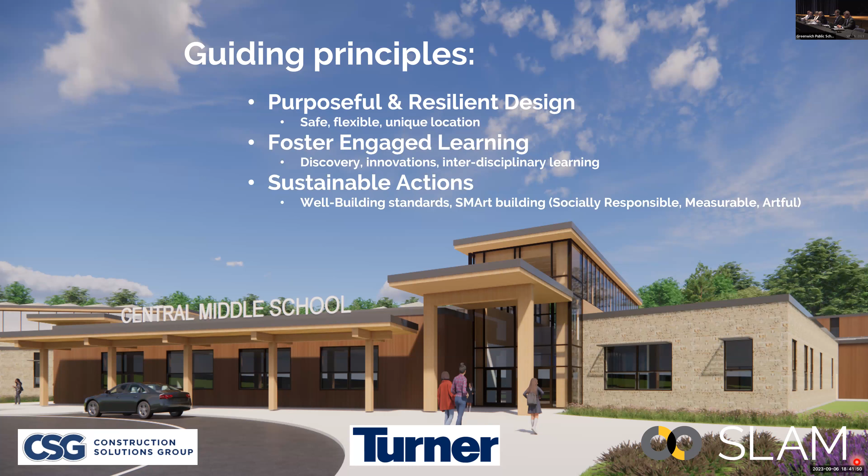The building itself sits on the central middle school site, the existing site, and I think everybody understands the premise of the project — there's an existing building on site. We're going to build a new building where the existing playfields are, get that completed, tear down the existing building, and then build playfields where the existing building is.

One of the things we talked a lot about was just the perception of entering that site, how the building would be organized and how it would feel. A lot of those guiding principles helped form the architectural character. The design team's been working really hard on developing these 3D renderings to communicate the character we envision for the new Central Middle School.

This view you're looking at would be coming down the new main entry drive — the parent drive, where parents would come in, queue up, get as close to the front door as they could, drop their student off, and turn and come back out. You can see how the building fits back into the site nicely, with trees sitting up behind this two-story building, and how the whole building nestles into that northern part of the site. I'll show you the site plan in a little bit, but I think the character of the school is really, really important at this point.

Moving a little closer into the building, I mentioned that the parent loop loops in really close to the front door, so you can see how the front entry is really evident. We're trying to use some really sustainable materials for the exterior skin.

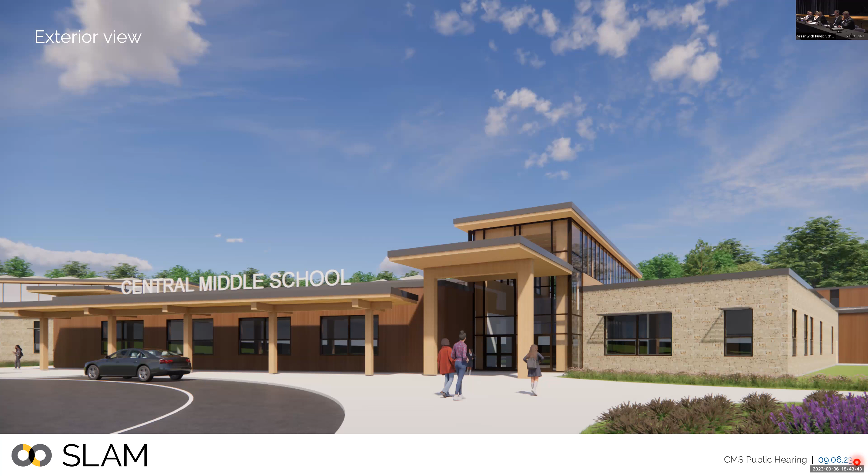You also see some hints of sustainability on the roof. We're anticipating photovoltaics on the roof, and all the renderings we're developing depict that, and we're trying to find a common thread and theme throughout the entire design of the school to be sustainable.

The other thing we've talked a lot about is safety for the students and staff, and anybody coming on site. It's been a recurring conversation, and every decision we make as we develop the floor plan and the site goes back to the question: are we creating a safer site for the students and staff and anybody on site? The answer is always a resounding yes, and the building committee's been really aware and cognizant of the decisions we've made.

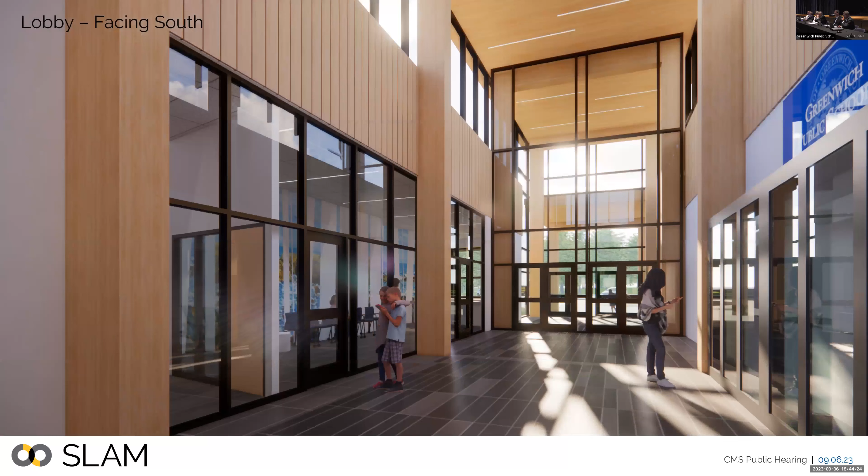Also looking on the inside of the building, the wood character actually replicates itself and turns into the building. One of the sustainable avenues we're exploring is timber construction, cross laminate timber roofs and beams in the structure of the building.

This is just a rendering of the main lobby. This would be a secure lobby - any visitor coming to the school would come through this space into the main lobby and check into the main office. You can see how the character on the inside of the building is beginning to replicate what you saw on the outside in the 3D renderings as well.

One of the really important things is not just the exterior skin and what it looks like, but the educational values. As we move into the building and start designing the floor plan, it's been absolutely critical to work with Tom and his staff to make sure we're meeting the Board of Ed's program requirements and educational specifications. There's a lot of interesting descriptions and adjacencies that are super important in that document. As a check and balance, we're always having conversations with Tom and his staff to confirm that we're providing the best educational value in the floor plans and the interior character depicted in some of these renderings.

For the interior of the building, which is clearly more my area of expertise, it's been great to work closely with the team. As Jim just pointed out, there's been a lot of back and forth from the EdSpec process into the actual layout of the building, and we've gone through numerous phases and options. What we love about this particular layout is how it really supports our educational experience for students and what middle school is really about for them - it's student focused and centered on what their needs are at a critical time in their lives.

If we want to go to the next slide, what we also love about being central is that we are a community space as well. We're frequently rented out by various community groups, and we want to maintain that level of partnership with our community in the best possible way.

So in looking at the design of the first floor, it really meets all of our educational needs and school-based needs through the layout of all the spaces down below, with the auditorium being a central focus, the gym and cafeteria off to the left, the media center toward the back, and offices and counseling space over to the right with some of our other electives.

Really the student experience when they spend their 2 periods a day in elective classes - it's all located on that first floor. But after hours, when these areas may be used for performances or rentals, they can be closed off from the rest of the school, keeping community use separate from the student academic spaces. I know our custodians also find that quite helpful.

We spend a lot of time discussing orientations and adjacencies, and also light. The courtyard in the middle - it's very important to have natural light in our classrooms for learning. It makes a positive learning experience for kids, and so how we were able to bring that in while nestling into the back of the hill was something important. That's where this courtyard came in, providing opportunities for art and other areas to bring in light, and the media center as well. So we're very excited about this.

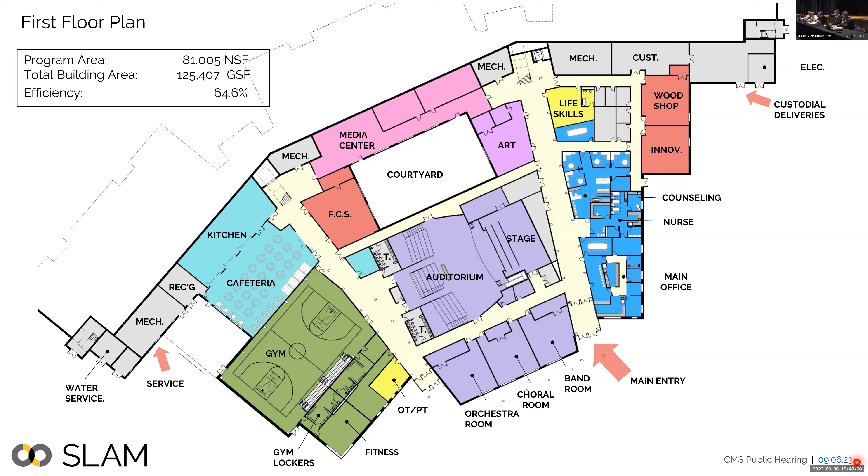Next slide. And then the upper wings, this is an ideal situation. If anyone knows... oh, I need to be louder. The problem is I'm using a microphone, I'm used to just bellowing.

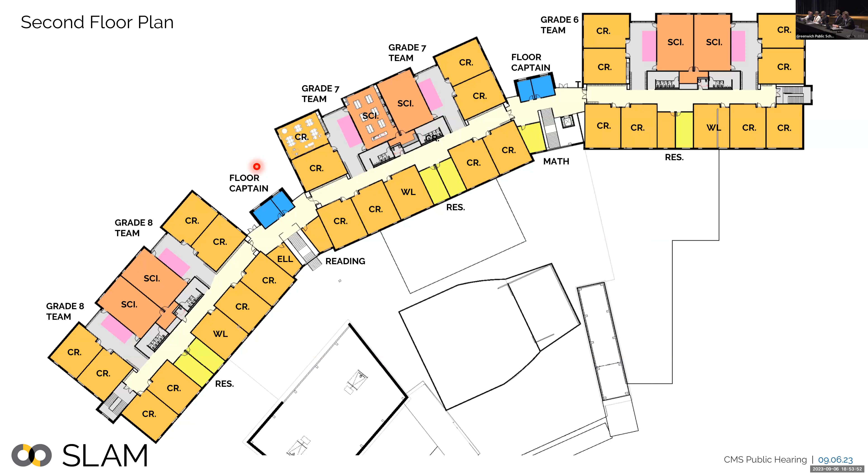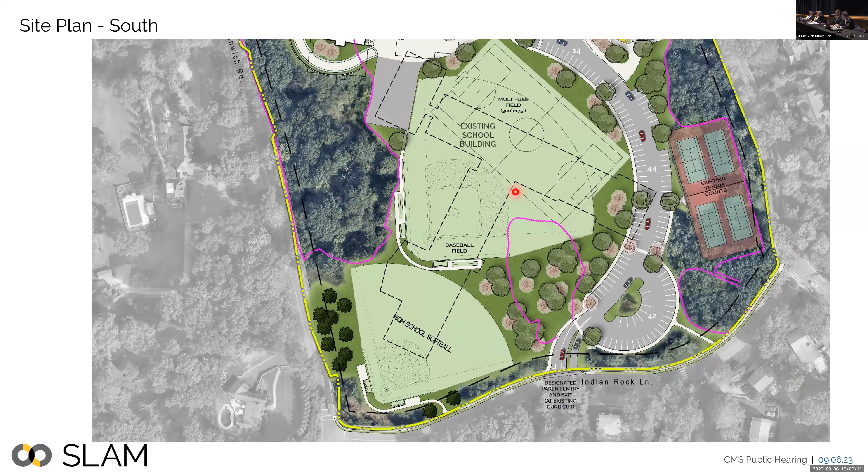Thank you. Can we go back just 2 slides and look at the large overview of the property? I want to be sure to connect with the perimeter neighbors, and I see Warren and Susan here who have been fantastic at attending our meetings and giving us input.

We heard very directly from the neighbors that Orchard Street is a racetrack. Some weren't quite so nice about it, but that's the message we took away. Once we understood it, we conducted numerous traffic studies from different angles. I think it's important to point out that we are pursuing a number of things to help reduce the speed on Orchard.

One is speed tables, crossing lights, speed cameras, and stop signs. We don't know the details of those items yet, but we do know what they cost, which is why we've earmarked $50,000 in the budget for that. We hope to partner with DPW on it, but I want to be sure to connect with the perimeter neighbors that we've not only heard you, but tried to be very thoughtful and address your concerns through some of these current safety items. I just want to be sure to add that in for the neighbors.

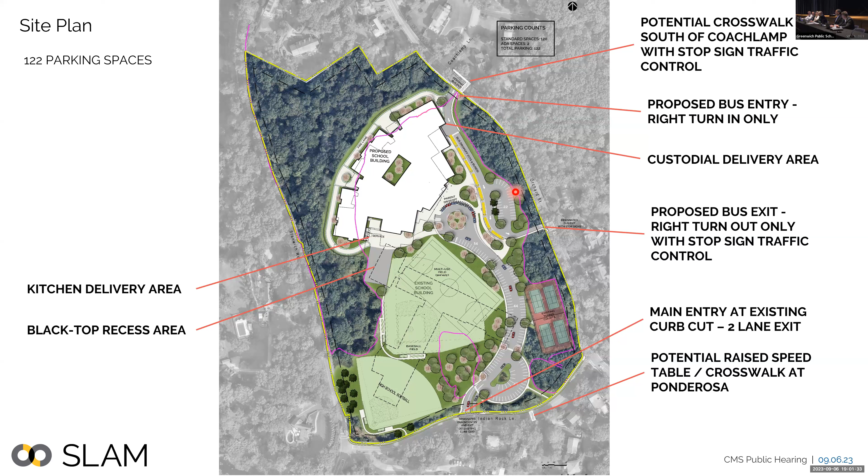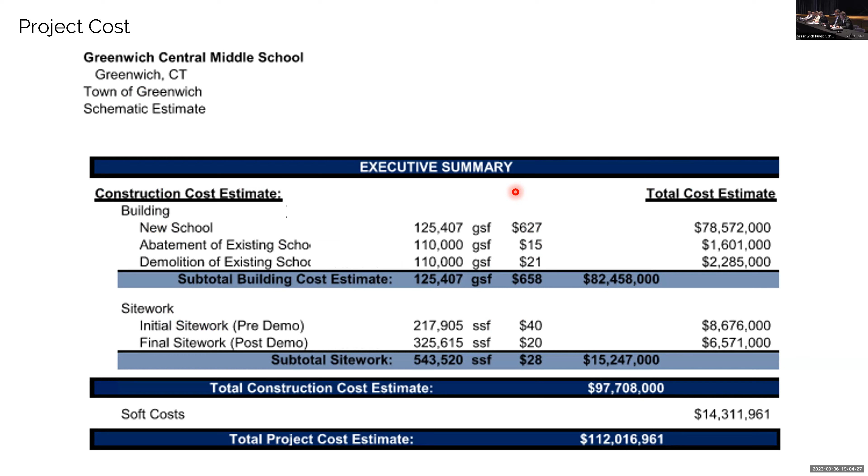It's important to go through the process of how we get here and how we arrive at these numbers. So I had started this by saying this is a project team estimate. We were tasked with performing a schematic design estimate, as well as SLAM - their estimating team was tasked with performing a schematic design estimate.

These were independent of each other. This was done in our own bubble, no collaboration, during a period of about three weeks to be able to perform this estimate. Once these estimates were completed - and again going through the process of these estimates - we used the

schematic design package that is issued by SLAM. This includes the drawings, narratives for all the material specifications for what's going to go in the building, the educational specifications and information available to them, and also the building information model created by SLAM.

We use that information to do our takeoffs. We count doors, we count windows, we do square foot of wall, cubic yards of concrete - all put together so we have a takeoff of quantities of materials that are going to go into the building.

From there, we need to then apply unit costs. Those unit costs come from historical data, benchmark data from recently bid work in this territory and region, and also from market analysis and market input. So for example, if the air handling unit that's going to go in this building is selected, we can go to the market and get today's dollars for that air handling unit.

So all that information is performed by us, it's performed by SLAM's estimating team, and it's done again independently of one another without any collaboration between us. Once that's done, we have a reconciliation phase.

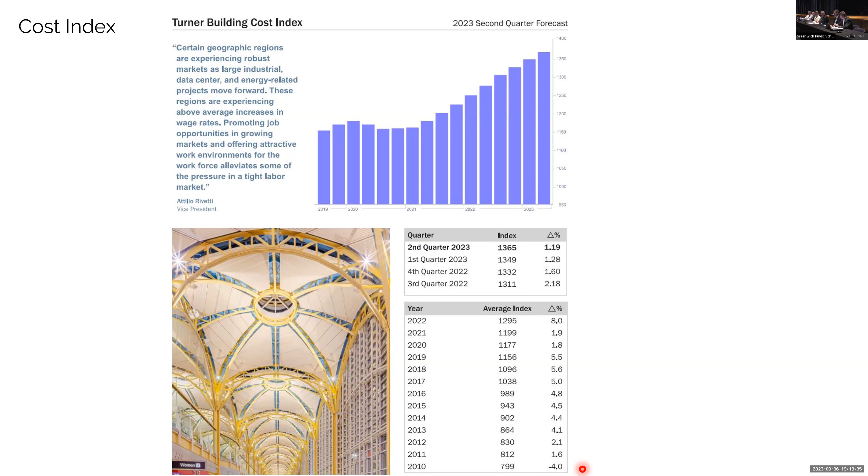Good evening, everyone. Jim Giuliano from Construction Solutions Group. I'm going to talk about what we've done, where we are, and where we are going.

Back in late April, the Board of Ed approved the final educational specifications, which allowed SLAM to begin the design process. The first step was the conceptual design, done mid to late May this year. Then Turner did a conceptual design estimate, a very brief, abbreviated estimating exercise to understand where we are budget-wise. From there, SLAM continued with design, doing the schematic design, which they finished around the end of June. Then, as Tim mentioned, both Turner and SLAM estimating teams got together and separately did their estimates for the schematic design.

During the schematic design estimating process, we had our P&Z pre-application meeting, which went well with SLAM. After the schematic design estimate was reconciled, the value management items were reviewed and determined by the building committee on how we're moving forward. That kicked off the design development phase of the project, which started about two weeks ago. From within design development, we'll go through our MI process and approvals, and once that's completed, we'll get final town funding. Then we will be submitting the state grant application.